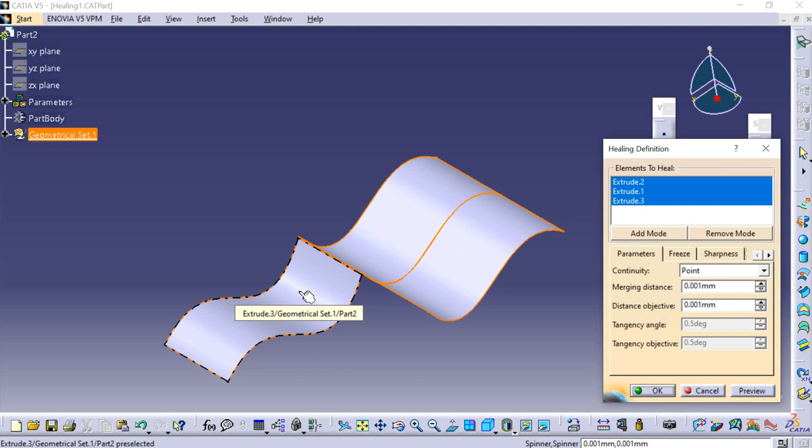After this, let us click on OK. Click on keep all sub elements and click on OK. And hence we have got healing done. So in some cases, depending on the geometry configuration and the set parameters, the multi-result management dialog box is displayed. So hence we have to click on no or refer to creating the nearest entity of a multiple element.

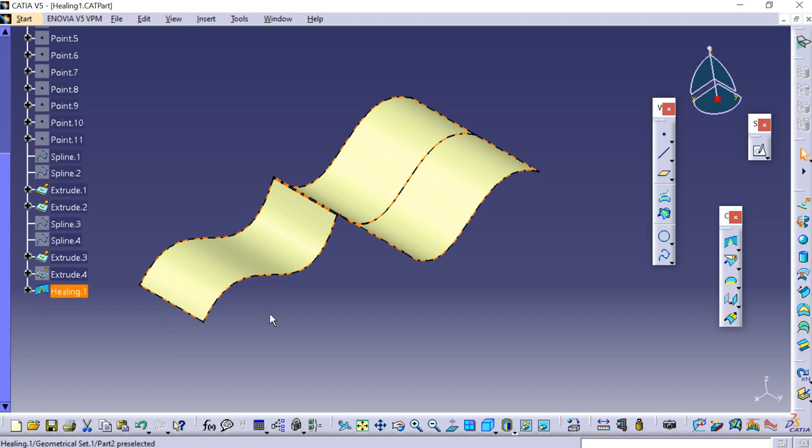When the healing has failed, the update error dialog box appears. Click on OK to improve the geometry. The errorless elements are displayed on the geometry. Now we can see that we have merged a distance of 0.001 mm with a tangency angle of 0.5 degree, distance objective of 0.001 mm and tangency objective of 0.5 degree and a sharpness angle of 0.5 degree. Hence healing is done for this CATPart.

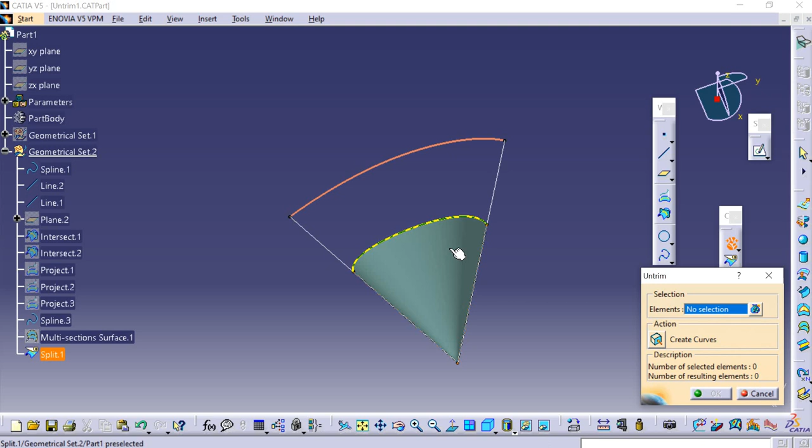Restoring a surface. In this task, we will learn how to restore the limits of a surface when it has been split using the break icon. First, let us click on the untrim icon and select the element and click on OK. The restored surface or curve is identified as Surface Untrim.xxx, that is Surface Untrim.1 in our case.

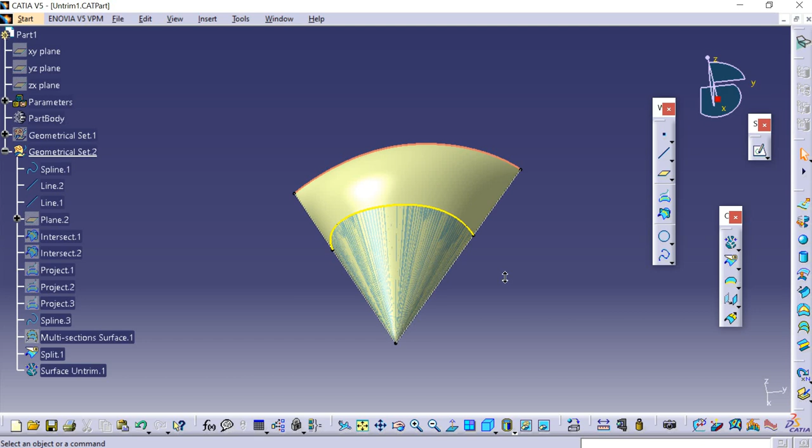If the surface has been trimmed several times, it is the initial surface which is restored. To partially untrim the surface, we need to use the undo button right after the trim. So this was the original piece that had been trimmed using break. This is how we use the restore or untrim icon.

Disassembling elements. In this task, we will learn how to disassemble multi-cell bodies into mono-cell bodies. Select the element to be disassembled. You can select any edge of the surface. The system recognizes the whole element to be disassembled. Here now let us select the disassemble icon and select the element.

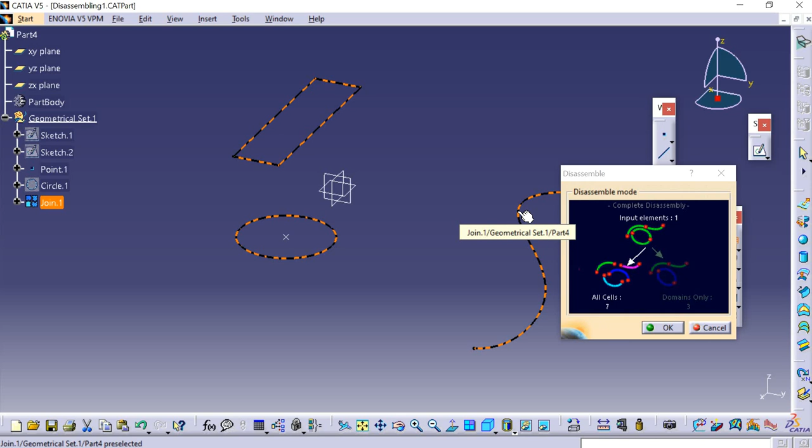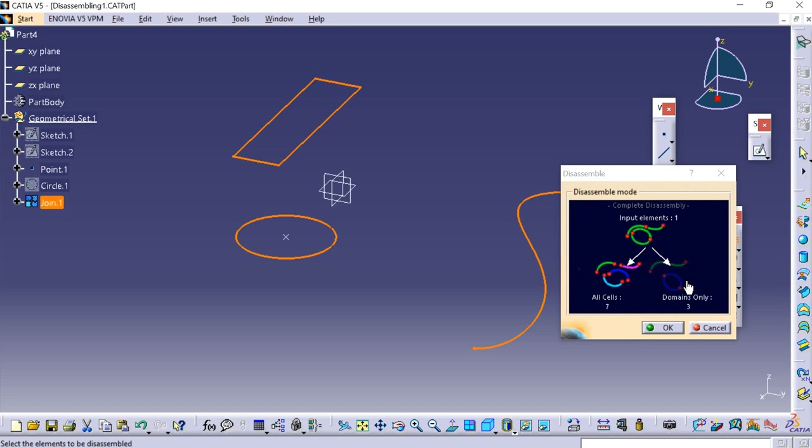All cells means that all cells are disassembled, that is, for all the selected elements, a separate curve is created for each cell. Domain only on the right side means the elements are partially disassembled, that is, each element is kept as a whole if its cells are connex, but is not decomposed in separate cells. A resulting element can be made of several cells. Now let us select all cells and click on OK.

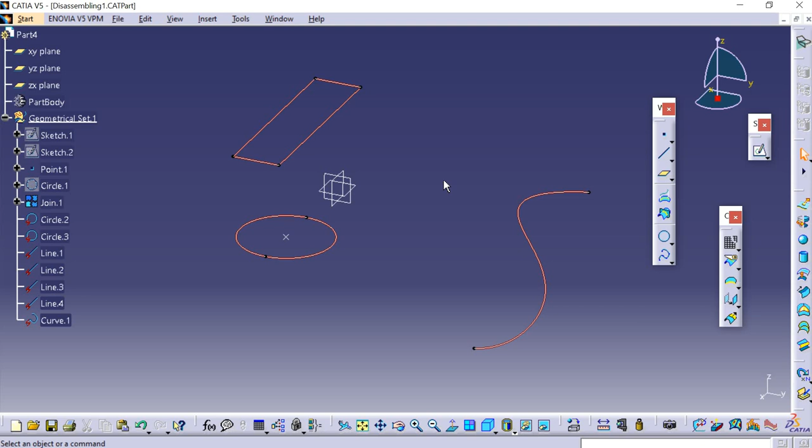A progression bar is displayed while the surface is being disassembled. Now the selected element is disassembled, that is to say independent elements are created that can be manipulated independently now. Like this is one element, this is another element, this is one element, this is another element, and each element is separated from the original element. This is how we use disassembling elements.

Creating boundary curves. This task shows us how to create a boundary curve of a surface. Click on the boundary curve icon and let us select complete boundary, and the surface edge is this. We can see that the complete boundary of the element has been selected. We can also select point continuity. So the surface edge will be the same and the limit will be from this point to this point. We can see only that portion got selected.

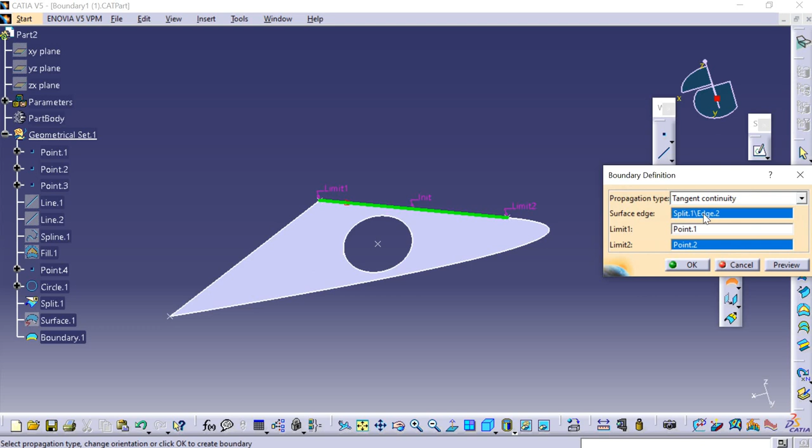For the boundary, we can have tangent continuity with the same surface edge from point 1 to point 2. We can see this whole thing got selected, but when we reverse the direction, it will not be possible. Only this tangent continuity will be possible. And when we select no propagation, this whole thing will not be selected, but only from limit 1 to limit 2, let limit 2 be this point.

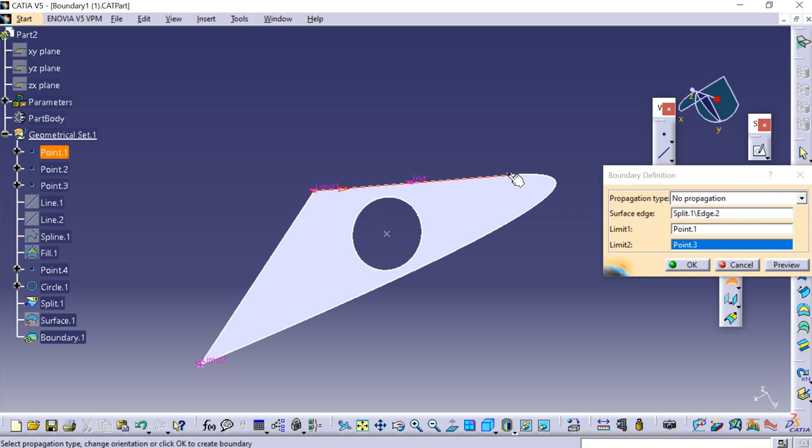We can see that the boundary got selected from limit 1 to limit 2 for no propagation. And this is how we use boundary.